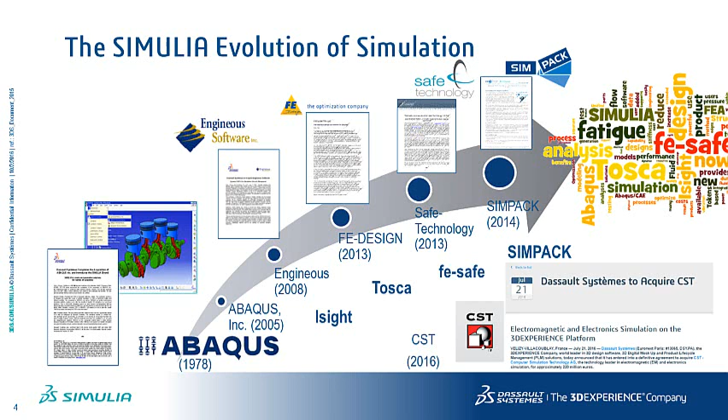In 2008, Engineous with Isight, 2013, FE-Design with Tosca Structure and Tosca Fluid, 2013, Safe Technology with fe-safe, and 2014, SIMPACK joined SIMULIA to enrich the simulation offerings. Finally, just this year, DS announced its intention to acquire CST for electromagnetic simulation.

All of the tools shown here are available within the extended licensing of the power of the portfolio from SIMULIA. Abaqus, our proven FEA technology, Isight for process integration and design optimization capabilities, Tosca to enable users to do structural and fluid flow optimization for conceptual and detailed design, and fe-safe, allowing users to study fatigue and durability in order to predict and analyze the product's life. We're going to cover three of these products in today's demonstration.

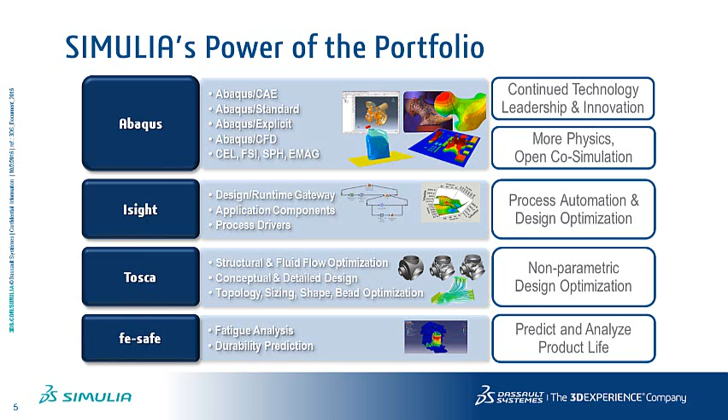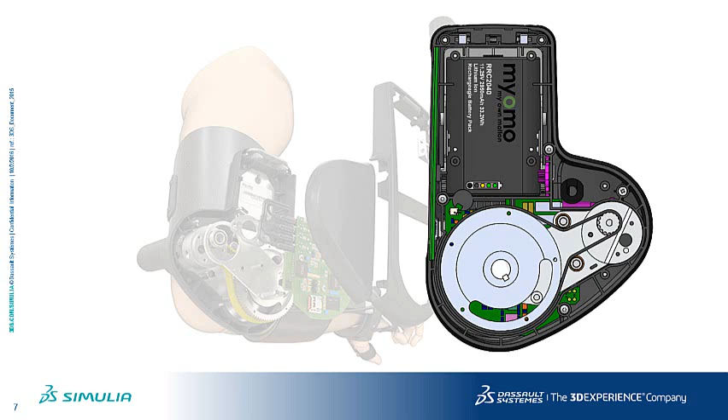Today, the design we'll investigate will be this arm brace mechanism for patients living with partial paralysis or weakened arms. We'll focus our analysis today on the motor and drive shaft mechanism that operates the arm. We'll break our analysis down into three distinct areas that we want to investigate. Valid mechanism control. First and foremost, our mechanism needs to work, and we need to be able to spec a motor that will operate the arm.

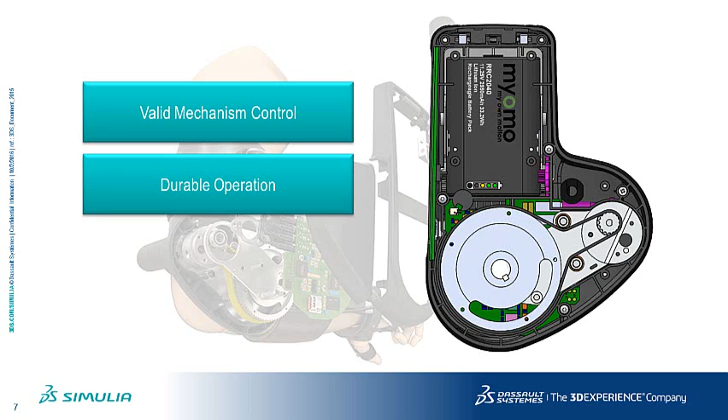Durable operation. Pulley system designs like these can be complex. We want to maintain tension in the belt, but not too little or too much. Durability will also be of utmost importance to our design, so we'll need to understand the belt in detail. Compressive stresses in drive belts like these can lead to fatigue and failure, so we'll pay close attention to the stresses and strains in the belt.

Lightweight. Of course, we want to come up with the lightest weight design possible. In this scenario, we'll focus on the gear mechanism. We'll need to have a slot for the cam, but where else can we remove material? We'll find out. As we move through this analysis process today, I want you to think about not only the aspects that we're focusing on today, but other aspects of this mechanism that should be studied using simulation. For instance, drop or impact testing on the shell or operation of the wrist. With the powerful solvers in the SIMULIA and SOLIDWORKS portfolio, everything can be studied before any material is cut.

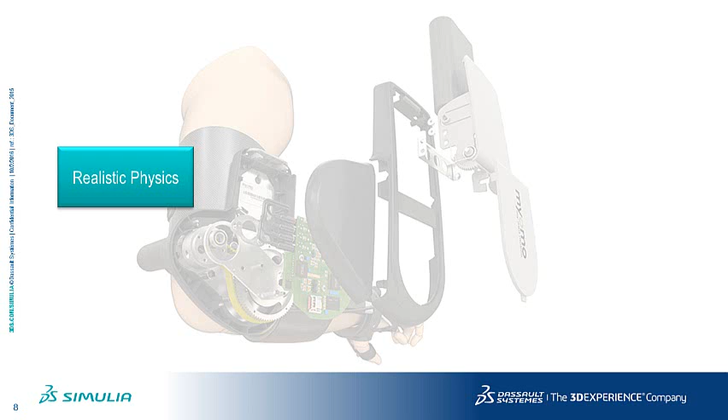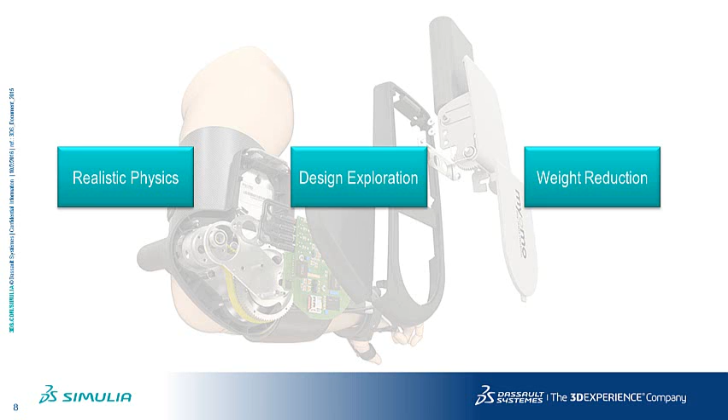So we're doing this analysis in three steps. We'll start with making sure we have a good understanding of the realistic physics in the problem. We'll take a look at exploring the design by changing some parameters. Finally, we'll see where we might be able to do some weight savings on this design. Let's hop right into our demonstration.

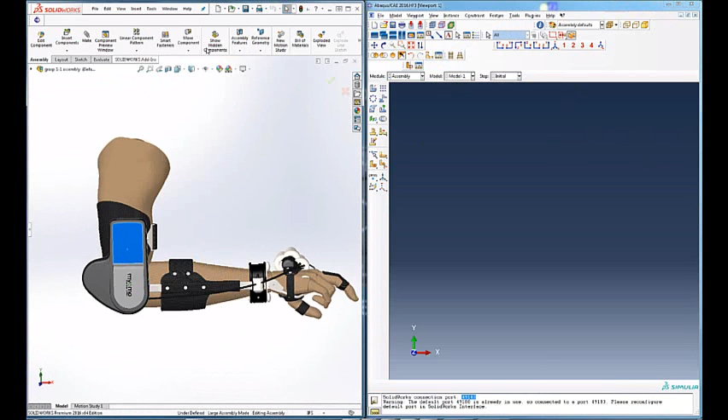Here we have the model of the geometry of the arm right within SOLIDWORKS. What we'll need to do now is bring this geometry into Abaqus. We can do that using the associative interface for Abaqus built into SOLIDWORKS. We're assigning the port. Check to make sure that the SOLIDWORKS install is recognized, and then export the geometry right from SOLIDWORKS into Abaqus to perform our analysis.

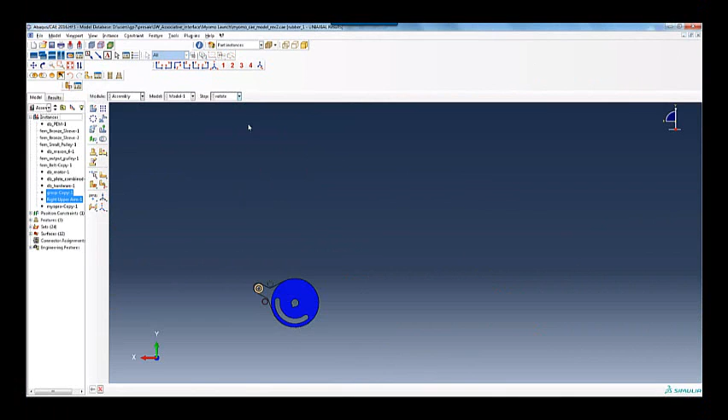What we're going to want to do in Abaqus is start by only focusing on the bodies that we're interested in. In this case, the gear, belt, and roller mechanism. So we'll hide different geometry to focus only on those aspects of our design. We're going to go through an already set up model and just review some key aspects of the setup.

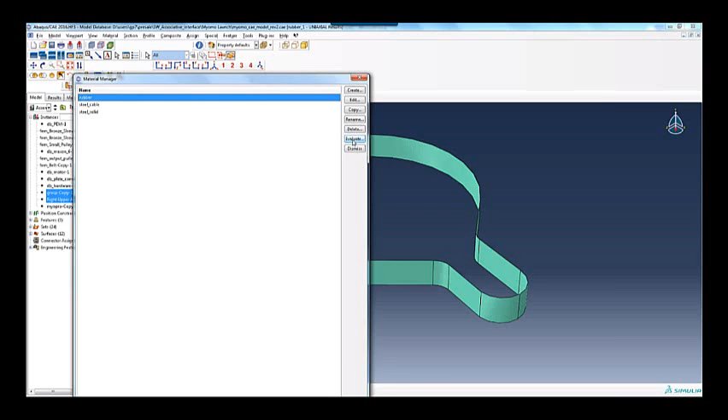Here we can see the belt material is applied as rubber. In this case, we're choosing a hyperelastic material and utilizing uniaxial real-world test data to come up with our material properties. Built right within Abaqus, we can evaluate our uniaxial test data in order to figure out exactly what material model is the most appropriate for this rubber.

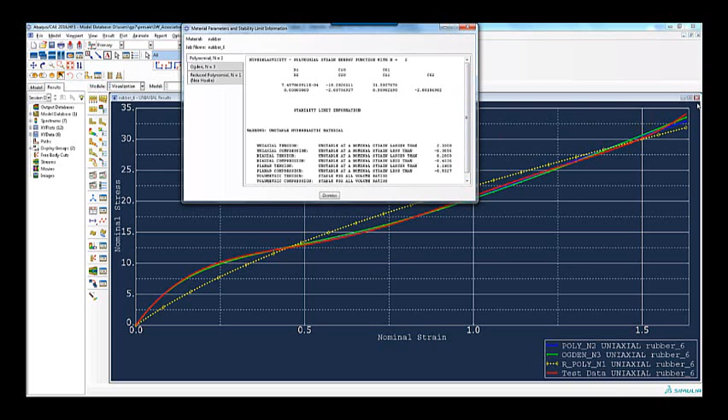We can see in this plot the Ogden model fits our red test data very well, the Ogden model in green. So that's what we're going to apply to this material model, to the belt. Right within the user interface, we can go to the material property and see that the Ogden model, 3 constants, has been applied to the belt structure.

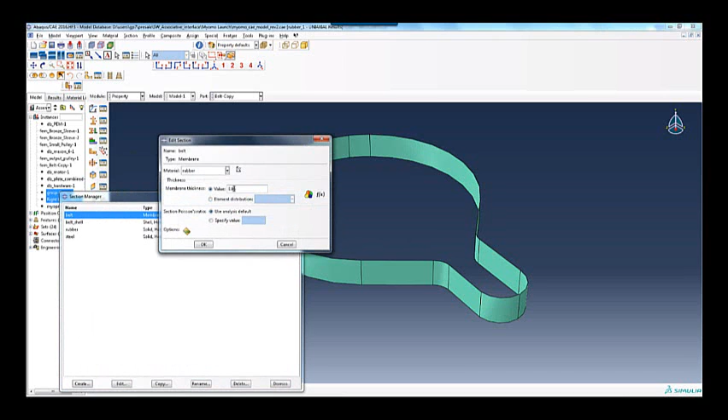Next, we're also going to add some steel cable reinforcements to the belt. We can specify the geometry and volume of the reinforcements. These are reinforcements laid longitudinally within the belt.

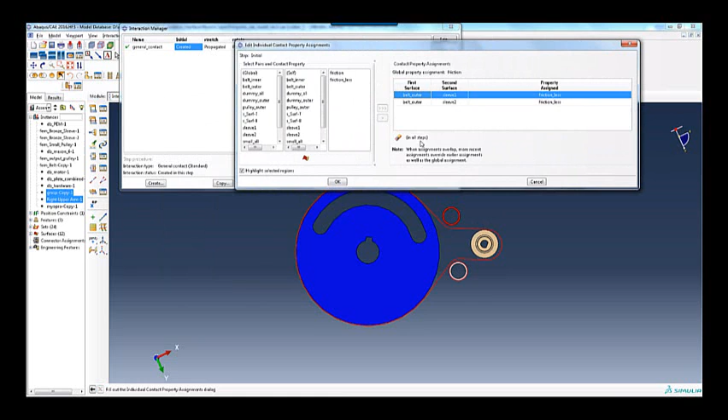Next, we're going to apply contact to our model. Abaqus has a model for general contact that will recognize all the contacting faces within our model and apply a friction condition to them. In this case, we'll want to specify no friction between the belt and the roller designs, but perfect friction through the belt and gears. And general contact allows us to do that.

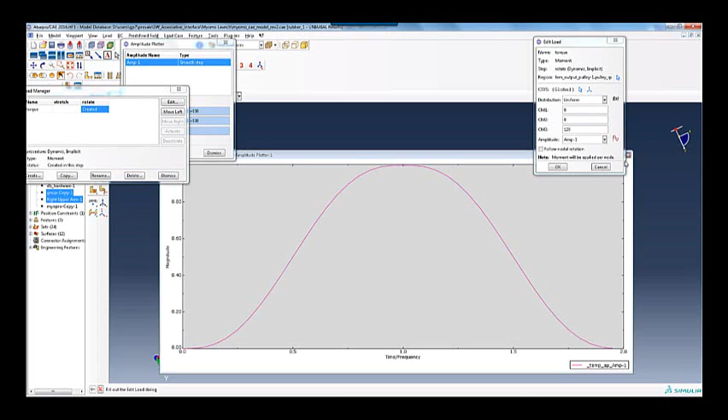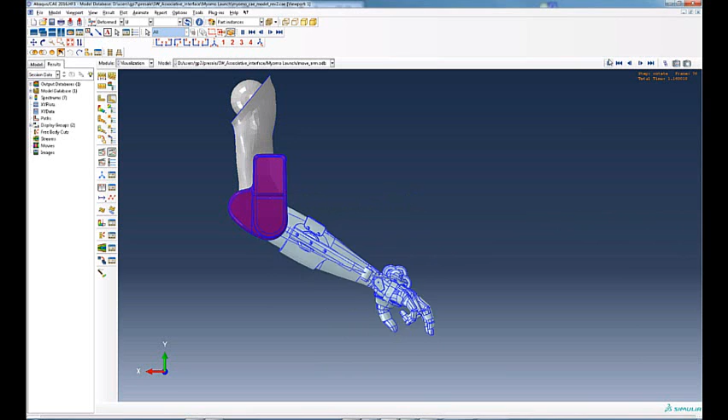Now, let's have a look at submitting the job. We can submit the job to run on multiple processors and take advantage of the powerful solving capabilities within Abaqus. Once we solve, we can move on to reviewing the results. On first inspection of this design, we've kept the display bodies on, but those weren't a part of the analysis, but they become a part of the visualization technique that we do. And we can see the driving mechanism of the arm.

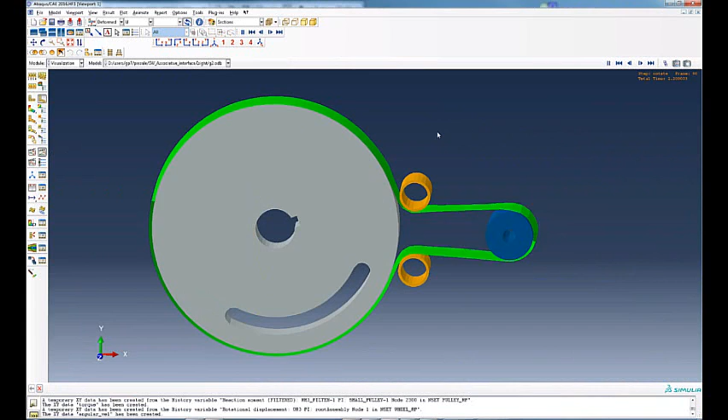Important thing to note here is because we use the SOLIDWORKS associative interface to bring the geometry right in, if we went back to SOLIDWORKS and made any design changes, we would be able to automatically export the geometry right back into Abaqus and rerun our simulation without having to reset anything up. Here we can see the drive mechanism, just the belt, rollers, and gear.

And first thing we might want to look at is the von Mises stress in the gear itself and see if it's below the yield strength in the material. Next, we might want to look at the angular velocity and torque of the motor. This will allow us to come up with the correct sized motor by calculating the power from these 2 plots. And we can see where the maximum peaks are in angular velocity and torque.

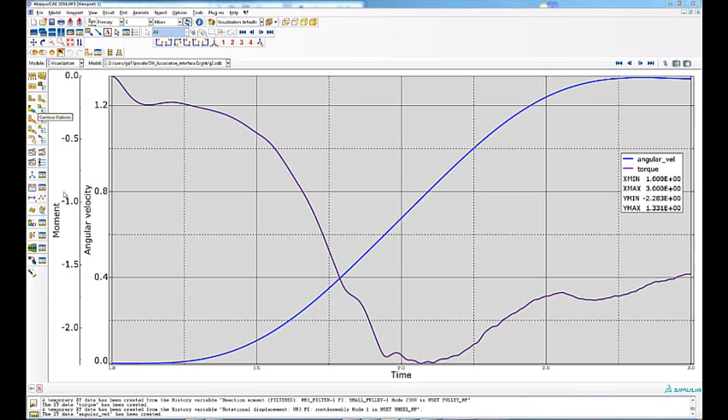Next, we can do a nice visualization of our design and have a look at those steel reinforcements that were placed within the rubber belt. And we can do an animation of this plot to see how those reinforcements behave throughout the simulation.

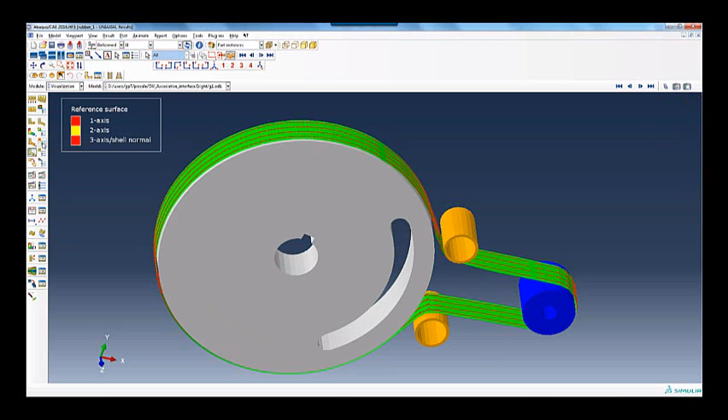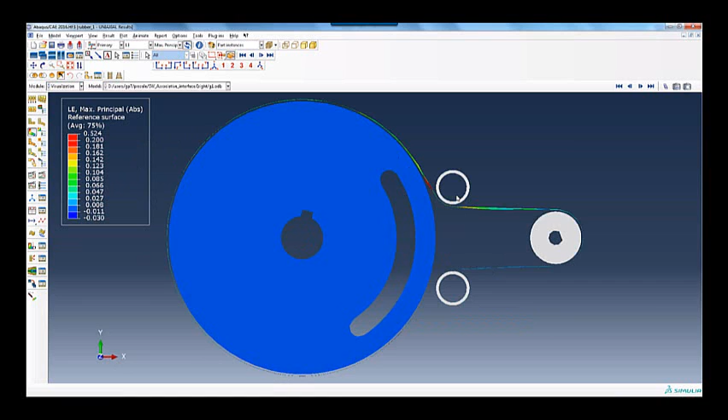Finally, we might want to have a look at a contour plot of the principal strain within the belt. What we can see here is we have a relatively large principal strain of about 52%. So that could be an issue for our design in fatigue. In addition, the maximum principal strain, the minimum value, is actually negative. This indicates that we have compressive strain within the belt, which also could be an issue for fatigue within the belt. What we have now is a really realistic representation of our physics, and we can now go about making design changes to our design.

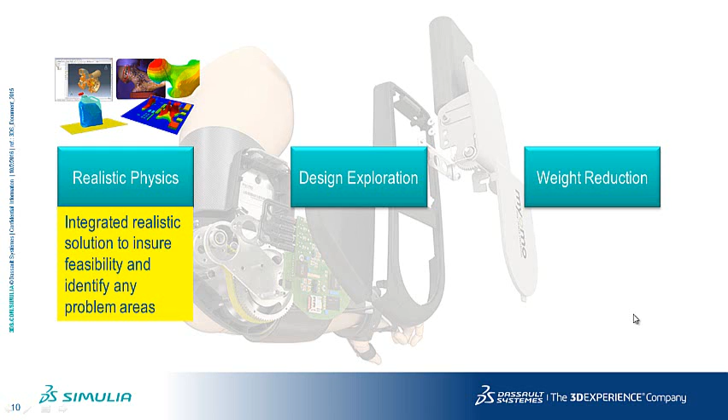Now we just saw how we could use the power of Abaqus to simulate the realistic physics of the problem and ensure the feasibility of the design, as well as identify any problem areas. Now let's see if we can make our design better by leveraging the power of the portfolio to make design changes. Now that we know our maximum first principal strain is too high in tension, and our minimum first principal strain is too low, indicating compression, let's look at some design variables that we might change to get us better results.

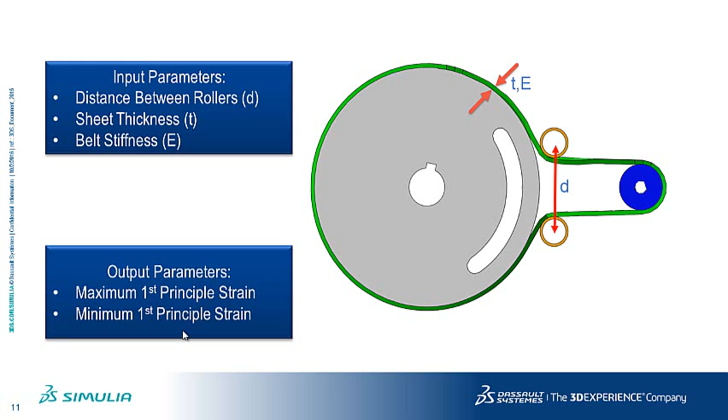First, we know that changing the distance between the rollers will affect any tension and potentially any compression within the belt. Additionally, belt thickness and even material properties may play a role in these strains that we're most interested in optimizing. Finally, we'll need to monitor these strain parameters, and our goal will be to minimize the first maximum principal strain to relieve some tension, and to maximize the first minimum principal strain in order to avoid any compression. We can use iSight to automate these design changes in Abaqus. iSight is all about helping users automate and optimize repetitive tasks.

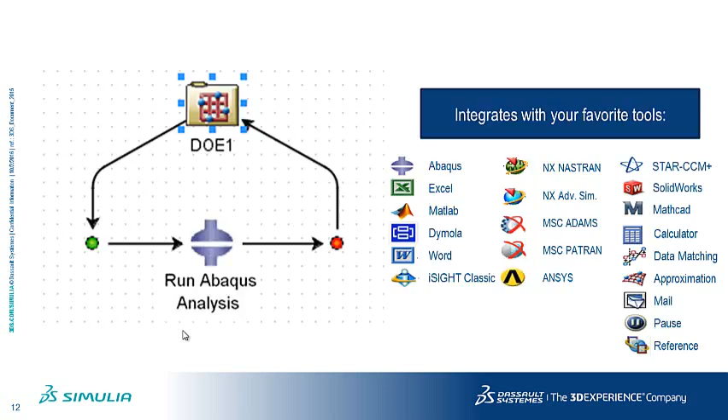Of course, it works with Abaqus, but it also might work with many of your other tools in your toolbox as well. In this example, we'll do 3 different iterations of 3 different variables for a total of 27 different runs. After iSight runs, it collects all of your results and gives you the power to investigate what parameters are most influential on the design.

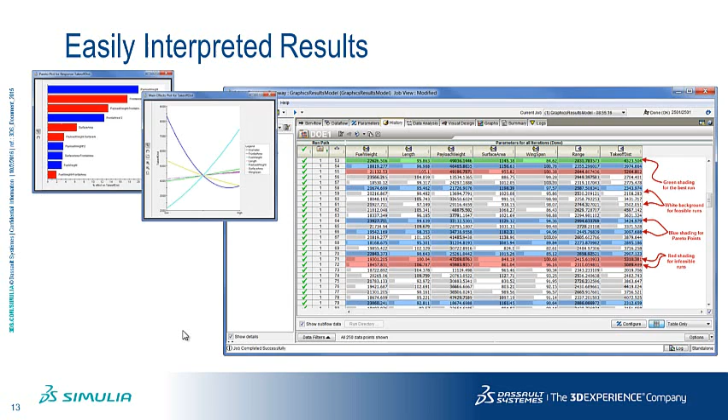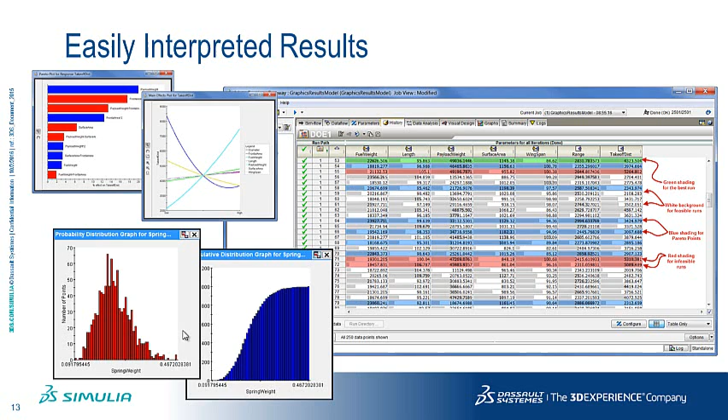You can immediately view a table of results which shows you the best design as well as other influential designs. Pareto plots give you a sense of which parameters are most important to the results you're trying to optimize. All of the plots can be viewed in many different ways and are automatically created within iSight to give you the confidence and justification for your design decisions. With iSight, you'll always be ready for your design review.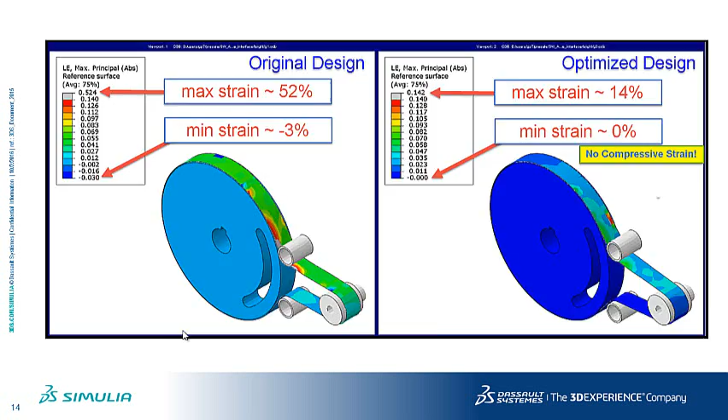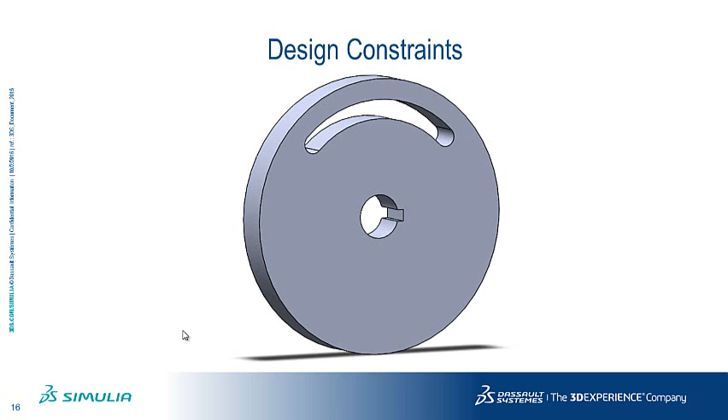With Isight, we were able to completely explore our design space in order to come up with the optimum design for our purposes. Now, let's see how another SIMULIA product might help us remove even more weight from our design. Let's have a look at potentially removing mass from this gear. Where should we start? Should we just cut holes? We can do better than that, but we have to keep a few things in mind.

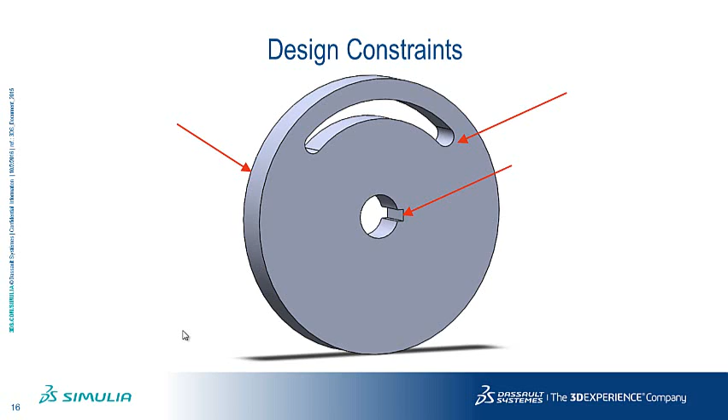First, we'll need to maintain that slot that allows for the gear to rotate through the support structure like a cam. Second, of course, we need to keep the shaft hole and key. And third, we'll want to maintain our thickness so our belt always stays on the gear. Finally, we'll want to ensure our part is manufacturable. Let's see how we can take all of these into account with Tosca from SIMULIA.

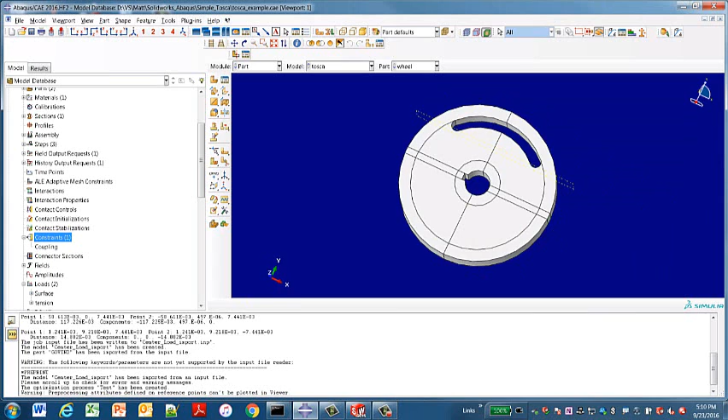Tosca optimization software within Abaqus is going to allow us to use the software to tell us where it's appropriate for us to remove material from our design. We're going to start with the complete design space or full complete geometry, and we're going to let Tosca tell us where we can start to cut some holes.

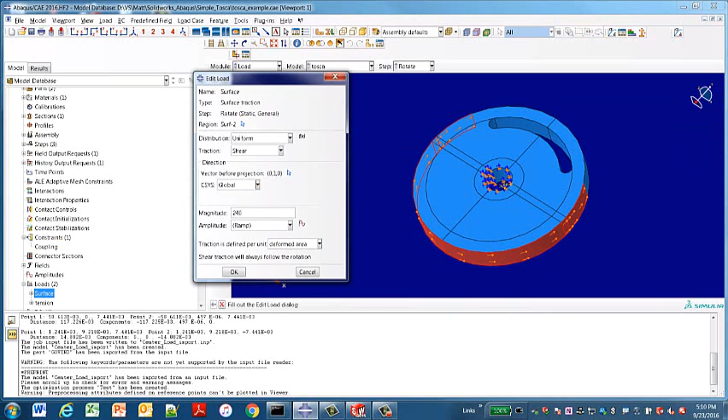In this example, our full gear analysis and loading conditions are coming right over into this gear model in Tosca. So we can see we have our belt load. We're also going to have some surface traction coming from the belt loading conditions. And in addition, we'll have some torque that was applied from the arm and the motor. All of those loads come right in from our previous analysis.

Next, we're going to set up our optimization task using Tosca. In this case, we're going to be doing a topology optimization, but Tosca has the capability to do shape, sizing, or even bead optimization. When we first create our Tosca study, we're going to set up some different settings. For instance, we'll freeze different loading and boundary regions, and there's lots of different other settings associated with the optimization that we're going to do. We're going to leave a lot of them as default and change one to a condition-based optimization.

Next, we're going to set up the design responses that we really want to monitor, the first being the strain energy of our design. This is going to ensure that as the material is removed, strain energy is kept track of so that we know that our stiffness can be maintained. We're also going to set up a design response for the volume of the material because we want to remove as much volume as possible or keep that as low as possible.

So we're setting that up here. The next thing we're going to do is we're going to set up our objective functions. In this case, we want to minimize the strain energy in this design in order to maximize or maintain the stiffness of the design. Next, we're going to set up our constraints of the design. In this example, we're going to want to remove as much volume as possible. We're going to try to take out up to 70% of the volume within this design.

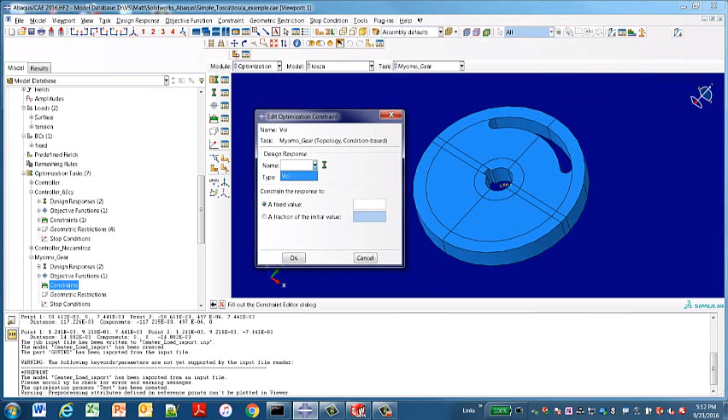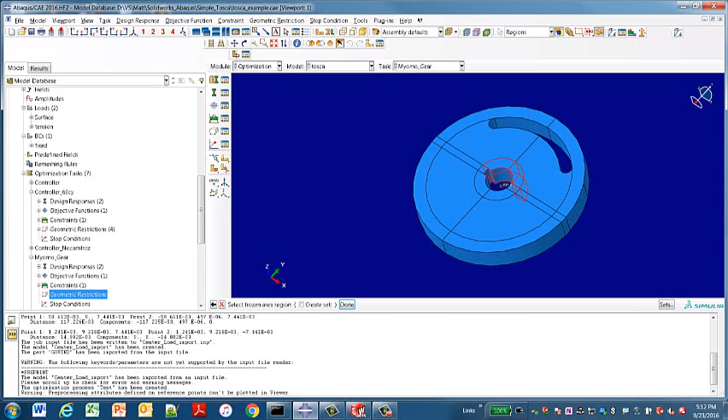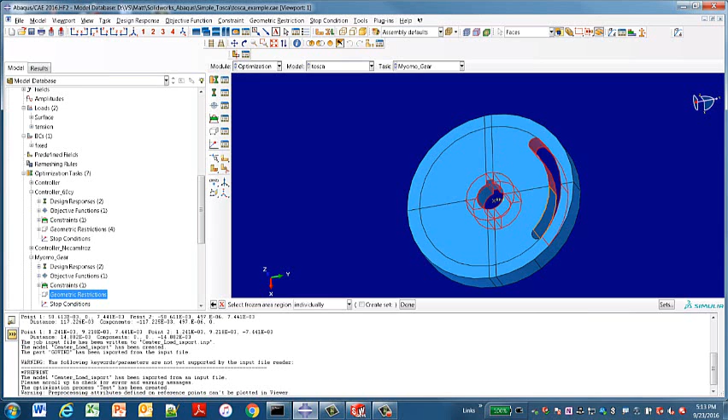Next, we're going to set up some geometric restrictions so that Tosca doesn't remove material where we don't want it to remove material. We're going to set up so-called frozen regions of the model so that Tosca only stays outside of these frozen regions. You can see we're selecting the geometry around the shaft and key because we want to maintain that geometry. In addition, we're going to select the geometry around the cam. Again, we don't want Tosca to remove that cam. That cam needs to be there to maintain the area where that bolt structure goes through to support the design.

In addition, we're going to freeze the region on the outer edge of the belt. Again, we don't want to remove any material because that material around the edge of the design is supporting the belt structure, so it can't be removed by Tosca.

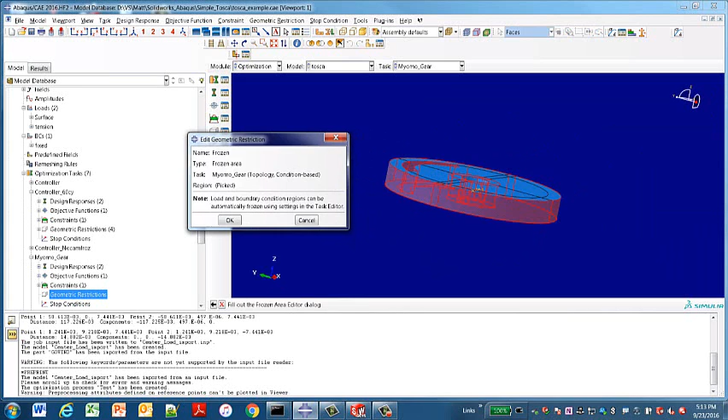Next, we're going to set up additional geometry restrictions. We're going to invoke a symmetry condition so that the Tosca optimization is done rotationally symmetric about the axis. In this case, we're going to shoot for 30-degree segments, or about 12 spokes in our design, potentially.

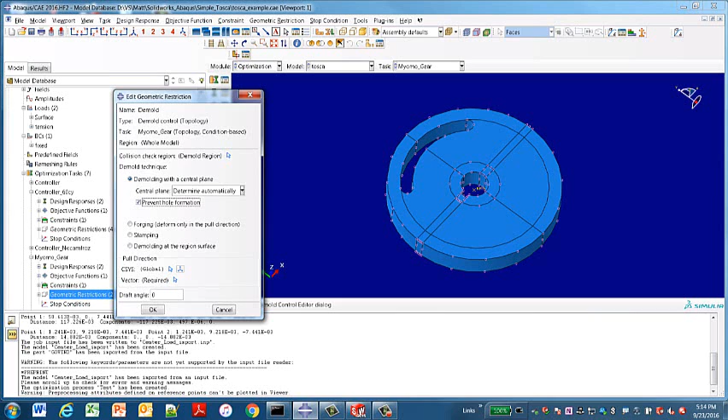Additionally, we're going to set up some demold control in our design. This is going to take into account the manufacturability of the Tosca optimized part. We want to make sure that the manufacturability of this part is maintained no matter what Tosca chooses to remove material from. You can see here we can take into account different manufacturing processes and make sure that Tosca comes up with the right manufacturable part. Here we're specifying the split plane for this particular part so that Tosca knows it can't create any undercut sections in this model.

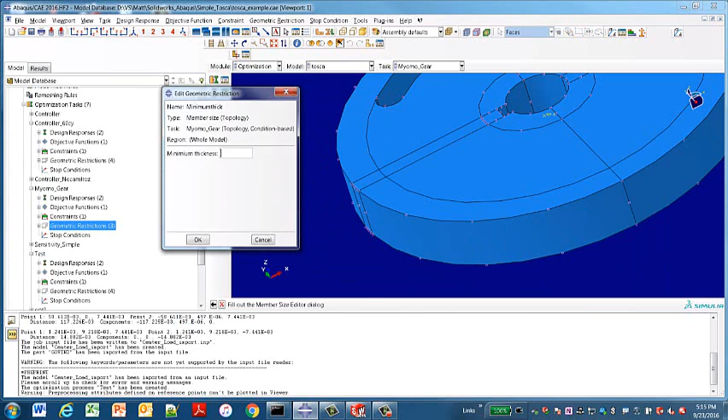Lastly, we're going to set up some thickness control in this design to make sure that the belt area doesn't get removed, and also the thickness of the belt stays the same so that the entire belt can fit on the gear itself. So we'll enter a minimum thickness that Tosca can make that, and that's the thickness of the belt.

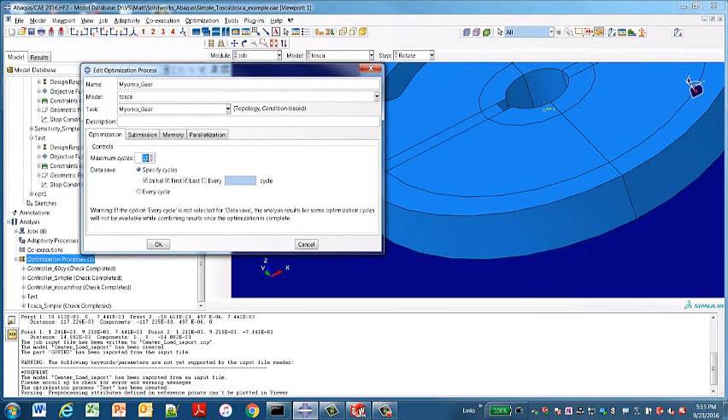Now we're going to set up the optimization run. We're going to allow for Tosca to do 60 different cycles, each time figuring out the strain energy and volume of the design and removing material where it's necessary and allowing the material to be maintaining the stiffness of the design. From here, we can go ahead and validate our design and submit our job to run on as many processors as we have tokens for.

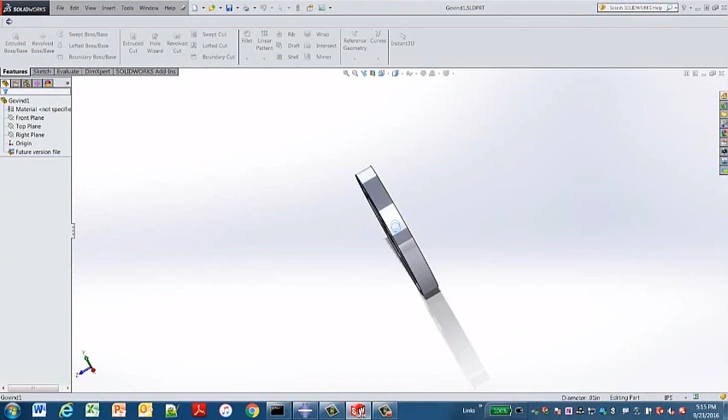We can see our digitally optimized design, and we have a nice kind of looking organic shape with different spokes around the outside of the geometry and then different slots around the design. Knowing this, we can move to SolidWorks and then actually just go ahead and create this design. We can see the spokes we created as well as those slots according to the Tosca optimized design. Additionally, the thickness on the inside there is thinner than the belt section. So we really were able to remove a significant amount of material.

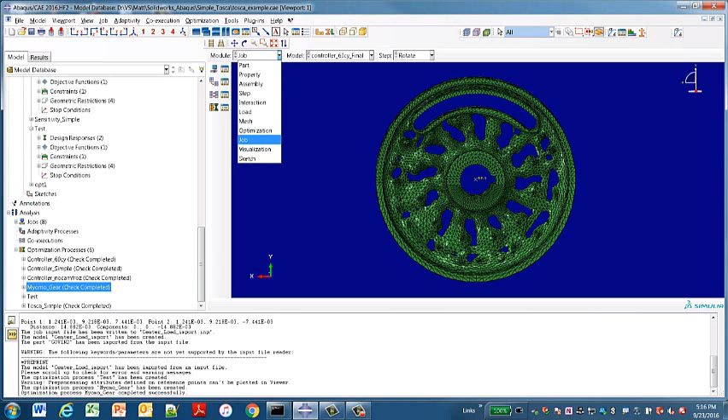Using the associative interface for Abaqus, we can export this geometry right back to our model and do a validation run and have a look at the results. Here we can see that the stiffness is maintained and the stress in the material is still below the yield strength of the material. So we have come up with a valid design which reduced a lot of weight from this design.

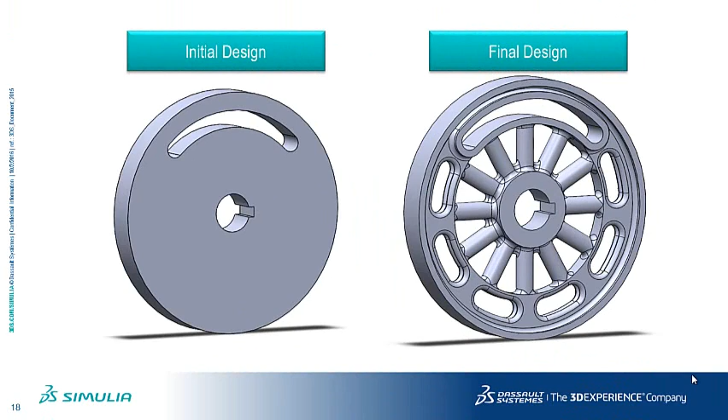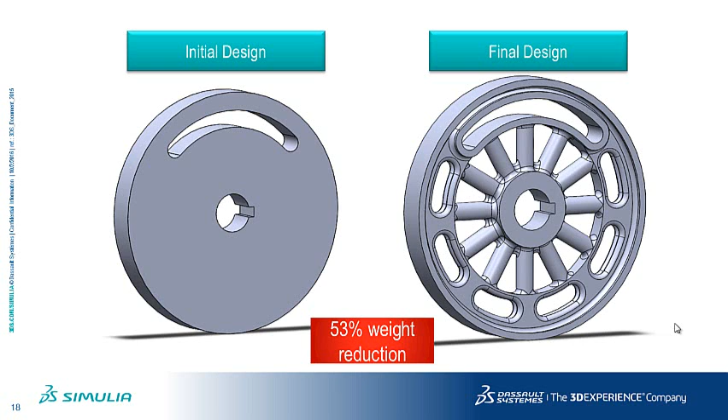Here we can see our initial design on the left and our final design on the right. If we compare the volume from the initial design to the final design, what we see is over a 53% weight reduction from the initial to the final design. We know that this is going to be the best design for us because the software told us where to remove material and ensure the reliability and stiffness of the design.

We use Tosca topology optimization in order to reduce weight in the design. The software decided where it was the right place to remove that weight. Instead of us cutting holes randomly in that gear, we know, by using the software, we're removing the material in the right spot.

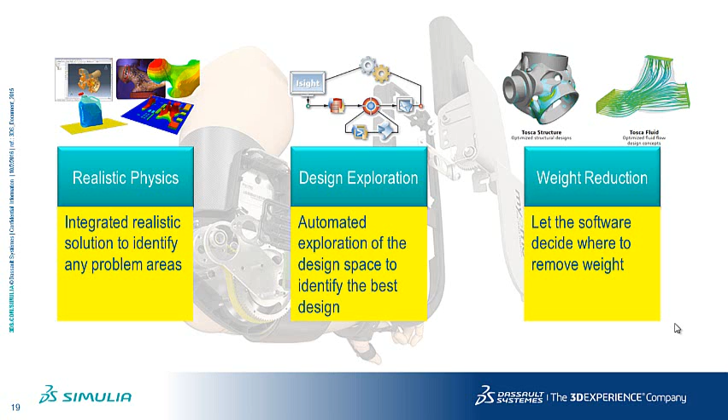Now, if we remember what our goals were when we started, we wanted to start with valid mechanism control. And using Abaqus, we not only ensured we had a working design and were able to size the motor, but we identified problem areas within the strain in the belt of the design. From there, we wanted to ensure that there was durable operation of the design. Isight and the power of the portfolio allowed us to automate design changes and automate the results processing in order to guide us to the best design, so that when we went to a design review, we would be able to justify all of our decisions and have the data to back it up.

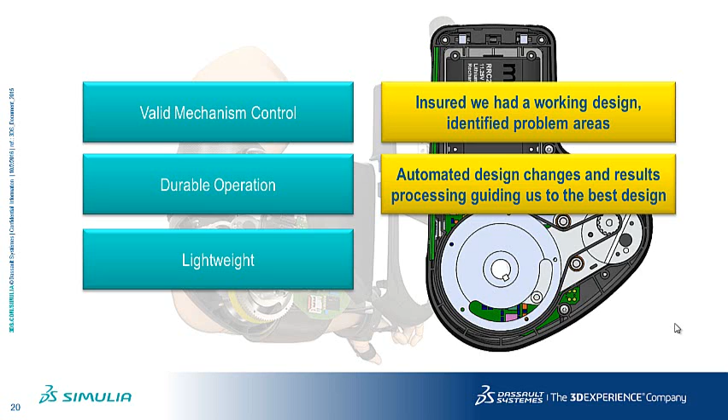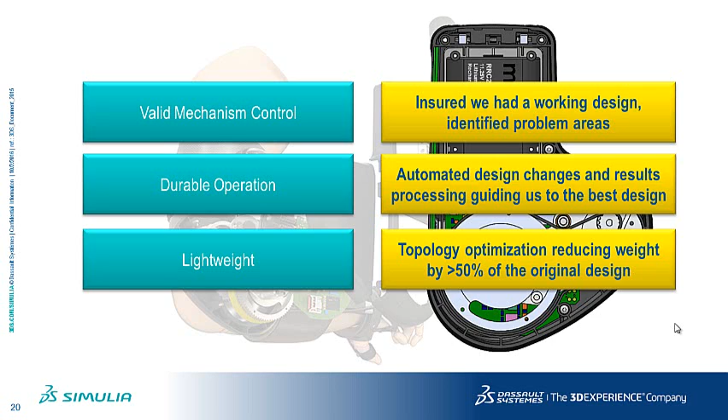Finally, we used Tosca to create a more lightweight gear of the design. The topology optimization using Tosca reduced the weight of the gear by more than 50% versus the original design. If we invite advanced simulation into our design processes, we can make our lives easier and truly realize innovation.